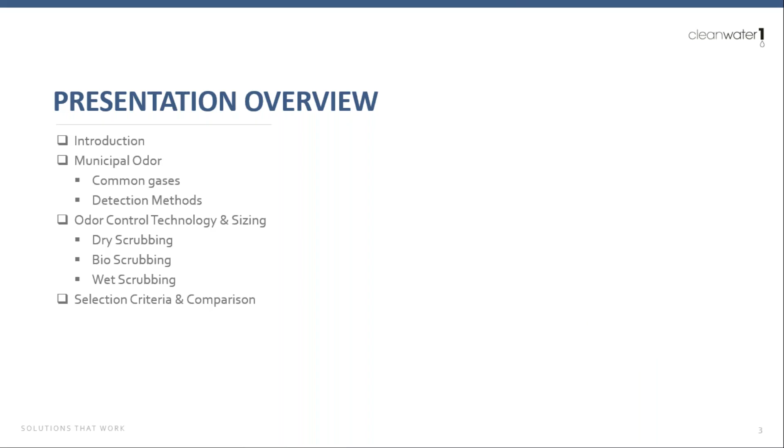Before we get into that, I want to do an audience poll. What best describes your role at your current company?

All right, so I'm looking at the poll now. We have about 67% engineers - awesome, welcome. We have some wastewater operators, everyone welcome, and some others undefined, but it's awesome. Great to see the attendance here for this webinar, greatly appreciated, and I think the information we have here should be quite beneficial and helpful.

So before we get started with the webinar, I just wanted to highlight some of the terms we'll be using during this webinar. Although a lot of these terms are used in my everyday vocabulary, it was brought to my attention that that may not be the case for others in this webinar, so I just want to make sure I'm being respectful as far as some of the terms.

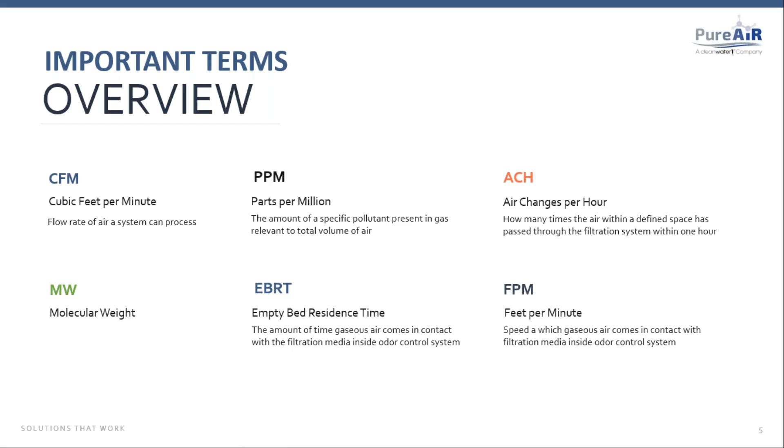For municipal odors, there are many processes that may cause odors in the municipal world. These odors can be generated at the collection systems or at the plant. It's important for us to understand, and we'll touch on it in the next slide, just highlight some of the most common gases, but also at each location it may have different challenges that may affect what would be the best solution.

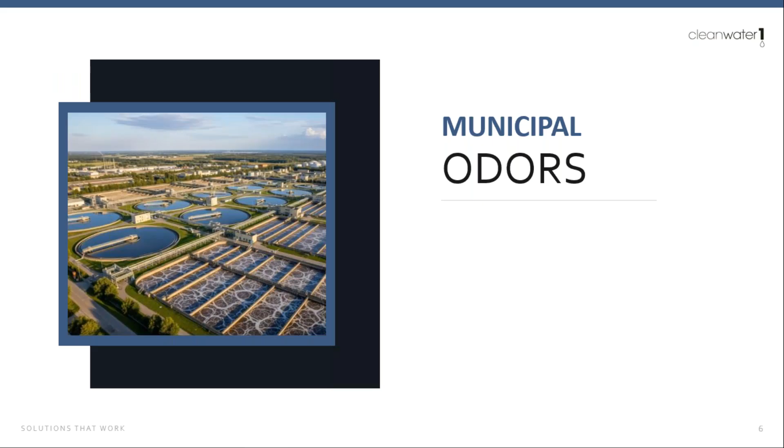That could come down to space or any space restrictions, site restrictions, or accessibility. For example, at collections, say lift stations, pump stations, etc., or also have force main, gravity sewers, and manholes. All those areas are going to have some type of odors depending on the process.

In general, the odors are going to be the same. You have the most common culprits, such as hydrogen sulfide, maybe some VOCs, mercaptans. But what can be challenging is, depending on those levels and concentrations, where do you put the system, or how can you fit the system to fit? Maybe it's a tight space or it's not easily accessible, and you have to get creative deciding what's the best system for that application.

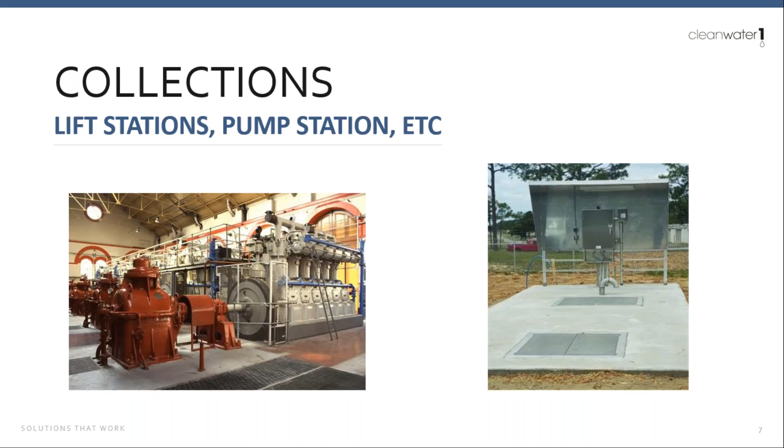Same with plant odors as well. Whether it's headworks, dewatering, belt press, etc., there are many processes in that facility. This has a great hand in creating different odors. And I definitely want to talk about, on some of the next slides, what are some of those common gases and how do we treat them.

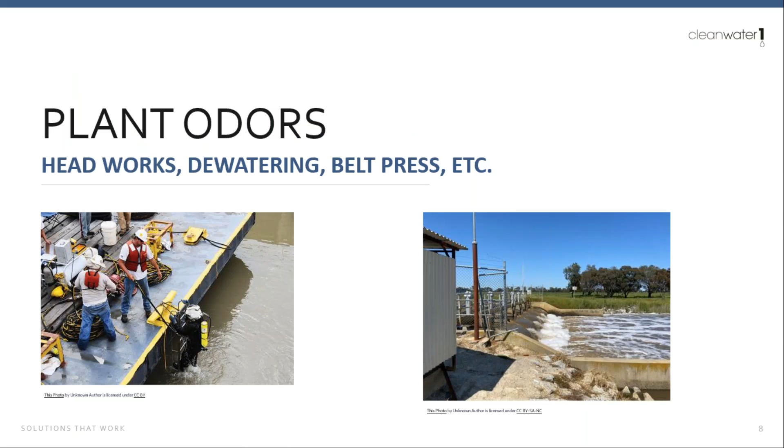Before we get to that, some concerns and considerations you want to keep in mind: each odor control application is going to be unique. You're not going to have just one, the same situation or same parameters as the next system. So you really got to take a look at the total odor removal, odor control needs. You're not just considering H2S.

Because H2S always brings friends along with it. There's going to be something else there besides H2S, whether it's some VOCs, mercaptans, reduced sulfur compounds. So with that, what do we need to do to make sure we're taking out all of the odors? Because if you just target one type of odor and the others are present, you're still going to get those complaints, or something's still going to be there present that's going to cause issues. So it's important to take a look at that.

We also have to allow for some flexibility as well. Because when I'm designing a system, you think about, all right, well, I know my airflow and maybe I know my gas level, or I might have to make some assumptions on the gas level, at least in the beginning stages. So we have that information right away. But what about footprint? Do I have any space? Are there any space restrictions? That could be very important to understand the best system.

I may think, well, we can use this system here, this would be perfect. But if it doesn't fit, you really can't use that. So you got to think of some creative ways to make sure you're selecting the right technology for that.

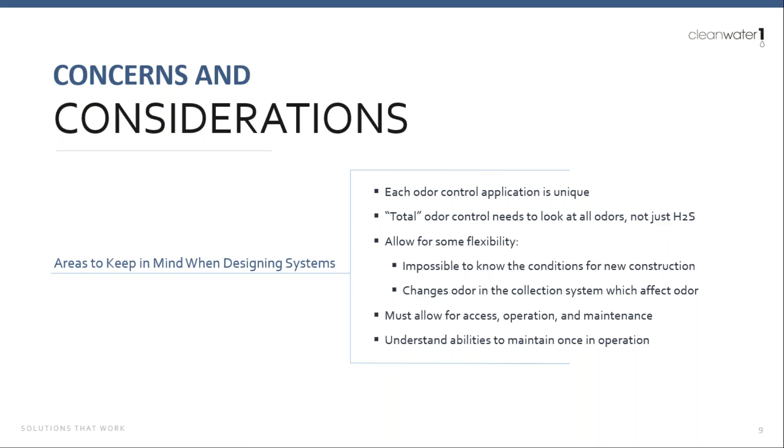All right, so some of the common gases in the municipal odor space. Now there's one way to figure out what odors are present, and you can just use your nose. This is probably the only method right now that I would use, only area where I would use my nose, if you're trying to identify a gas, at least in the beginning.

So it's not very scientific, but it can give you maybe a rough idea of what's present. For example, hydrogen sulfide, probably one of the more easy gases to detect. It has a rotten egg smell, and also a very low odor threshold. Now mercaptans and some of the reduced sulfur compounds, such as carbon disulfide, dimethyl sulfide, they have more of a rotten vegetable, decayed vegetable smell.

So you really just kind of get an idea once you walk onto a site. Okay, what am I noticing? So these are some of the odors, at least that gives you a start when designing the system, an idea. Now different odors are going to need different treatments as well, so once you know what's there, you can design the best solution, maybe a combination of different technologies, to give you that overall total odor removal.

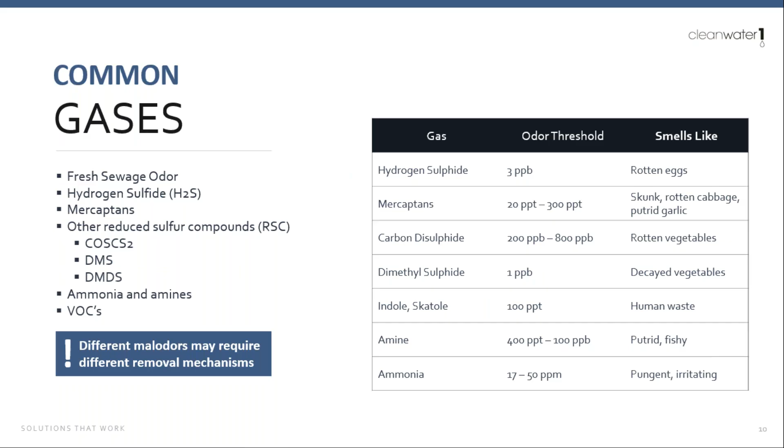Because again, you don't want to just focus on H2S, because his friends come along, and he brings more than one friend with him. So we want to make sure that we are taking a look at that, the total odor profile.

So now, like I said, using your nose, as well as making assumptions, can get you a good start on, okay, this is what gases I think are present. So we'll start off this solution. But at some point, when that project starts to progress, you really need to know what's in the airstream, so that way you are providing a complete solution.

So, for example, maybe two people can go on site. One person, using his nose, may have the scent of, say, rotten corn - I've heard that before, just describing some of the reduced sulfur compounds. Whereas someone else may smell just a beautiful aroma of putrid garlic. So which one is correct? Well, this person may smell it one way, this person smells it the other way.

So to eliminate some of that guesswork, there are a few detection methods that we use that determine, okay, what is exactly in this airstream? So it's important to use these methods to know what you have there.

So for example, the first one, if we suspect H2S and we want to eliminate that, there's a few different devices that can be used, whether it's OdaLogs and AcruLogs - we'll talk about that a little bit. So OdaLogs and AcruLogs are like H2S loggers. They can be placed in the odorous air source, usually left in place for maybe a week or two to three weeks or so. It could be longer. So what it's going to do is just log that H2S over time.

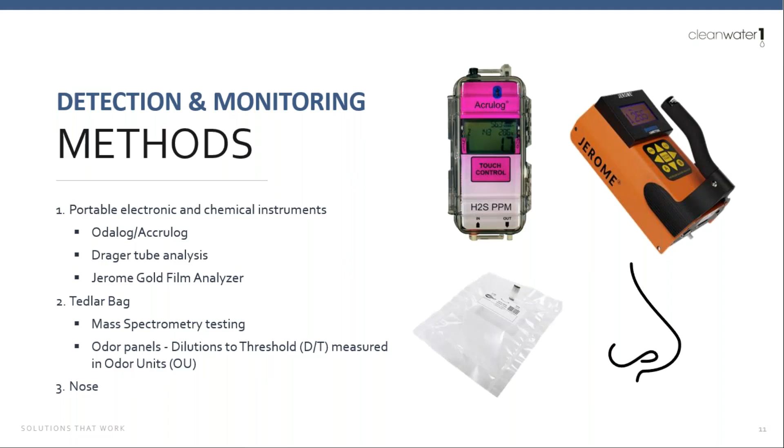So, odor control technology - today we're going to talk about 3 different types. We have dry scrubbing, wet chemical scrubbing, and also bio scrubbing for these systems. All these systems are designed to remove odors, and really the project conditions and parameters are going to determine the best and most cost-effective solution for doing that.

So in essence, what all these systems have in common, as we talked about with empty bed residence time, is that we need that odorous air to come in contact with the media - whether that's the dry media, the chemical scrubbing media, or the biological media. We need it to interact with that gas to remove it. So that is the end goal: to have complete odor-free air.

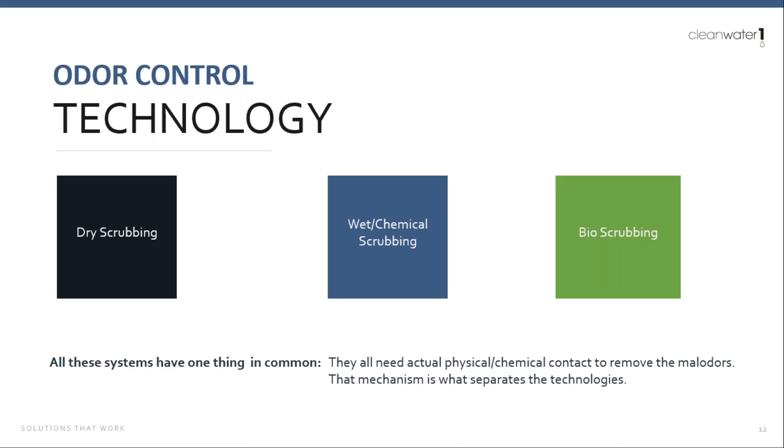So let's talk about some of the different technologies. We'll start off with dry scrubbing, the gas phase filtration. Really the best way of looking at dry scrubbing would be two different types: you have adsorption versus chemisorption.

So adsorption - just think of the adsorbent media for adsorption as a sponge. It's very similar: it's a very porous substrate, just used for air filtration. So sort of like a sponge, as a sponge is going to trap water, the actual media or substrate is going to capture those gases and hold them in place and not let them out.

Now, like a sponge, the process using just plain adsorption can be reversed. As you squeeze the sponge, you squeeze all the water out and reuse the sponge. In some cases, you can do that with some of the medias used for adsorption - whether that's reusing media by using water to wash away the gaseous molecules it trapped, or using heat to, in essence, regenerate the media itself. You may have heard of regenerated carbons, for example. So in those cases, it can be reused after reversing that process.

And in some cases, you may hear of off-gassing as well - whereas if the media captured a gaseous molecule, a larger molecule comes in and dislodges it, and that gas goes back into the airstream. So that's adsorption. Also, the term media life for adsorption can be difficult to measure, because there's really no quantifiable way to determine how much media is left in the pellet itself. So let's talk about chemisorption.

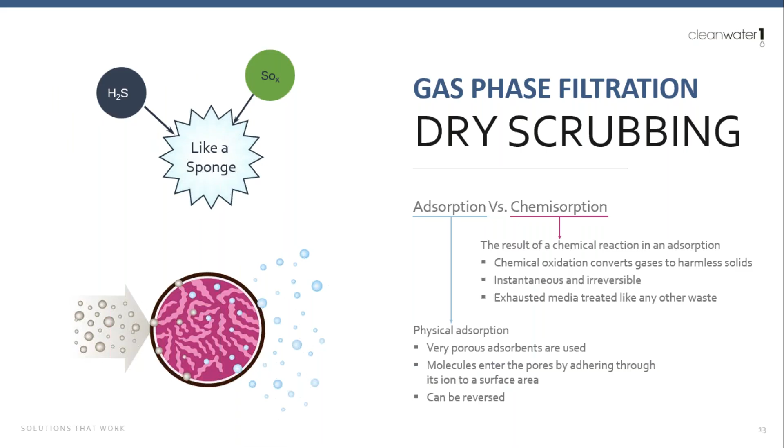Okay, this is a great slide. Just wanted to explain a little further how gas phase filtration works.

With filtration, let's talk about solids and liquids to give you an idea of the size of the different particles. Solids, in the form of dust or smoke, are about 0.03 to 100 microns in size. Typically, for example, a furnace filter in your home captures particles, and as it saturates, you take it out and put a new one in. Liquids, in the form of mist, are about 1 to 9 microns as well.

You have filters that capture that mist and drop it out. They can be permanent, or you can clean and reuse them for a period of time.

Now gases, as you can see, are very small in size, about 0.0003 to 0.007 microns. So a physical mechanical filter will not work, as those gases will pass right through it. That's why you need some type of substrate or media to capture those gases, and that's where the dry adsorbent media comes in.

Just for context, a strand of human hair is about 50 to 70 microns in diameter, which gives you an idea of the size. That wouldn't apply to me, since you guys saw in my photo my hair has long since departed, but for most it gives you an idea.

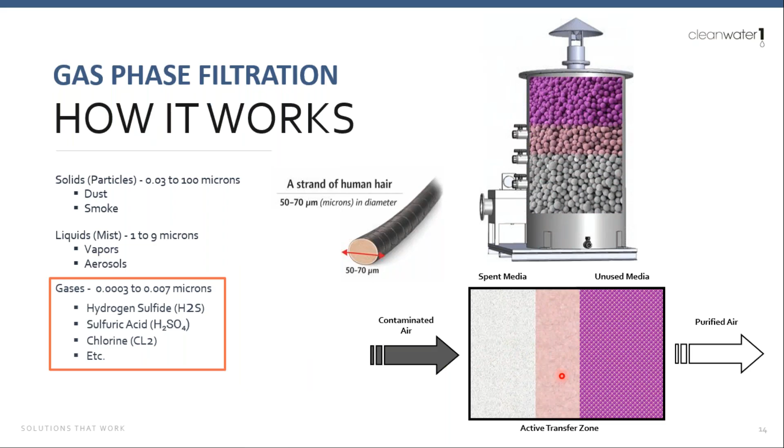Here are some of the activated carbons, different medias used for engineered adsorbents, activated carbons, and scavengers. As an example, activated carbon works more so as an adsorption media, capturing those odors and holding them in place. It's great for VOCs, not necessarily targeted gases, but it's been used for decades and is very effective for removing VOCs.

You have engineered adsorbents that can come in a host of different substrates and impregnates. This particular photo of an adsorbent impregnated with potassium permanganate gives that purple color, which is a great oxidizer for many different gases. The engineered adsorbents are designed to be targeted for particular gases, so they come in very handy.

It also allows for a system that's smaller in size, which can really help with any space restrictions as far as footprint as well.

And then we also have scavengers. These are great for a good low cost roughing type of filter or media that can be used in some applications. I liken scavengers to punching bags, they take the brunt of the hit while allowing some of the other medias to come in and polish it up.

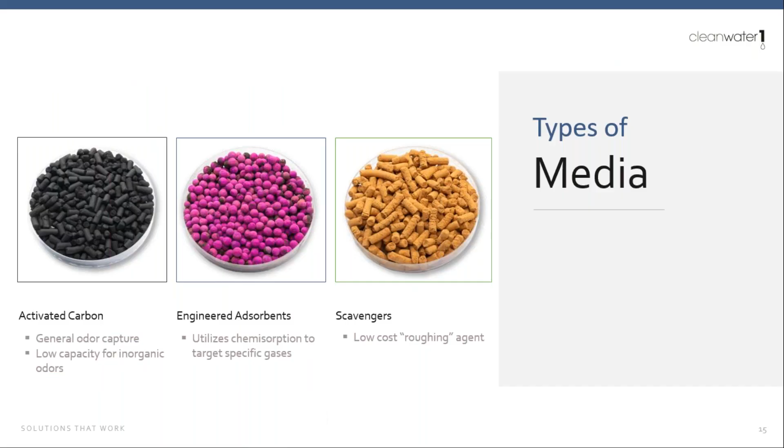Now, for dry filter media monitoring, as I mentioned previously, there's a working zone that moves throughout the media, and there are ways you can track that zone to know exactly when it's time to change it out. As I mentioned previously, when trying to determine odors, you can use your nose to get an idea of when it's time to change it out.

Now, this is one of those times where you do not want to use your nose to determine when your media is spent. This is a true story - I heard a vendor, who shall remain nameless to protect the innocent, say that the best way to know when it's time to change your media was to use your nose. Which means there's already breakthrough.

It took me a minute to think about that - wow, okay. So I had to break that down into terms someone would understand. I said that's the equivalent of saying the time to add fuel to your car is when you run out of gas.

That's probably not ideal. I think it's better to have a way of predicting when it's time to change out the media versus being reactive after you have breakthrough, or like having the fuel in your car stop. So it's very important.

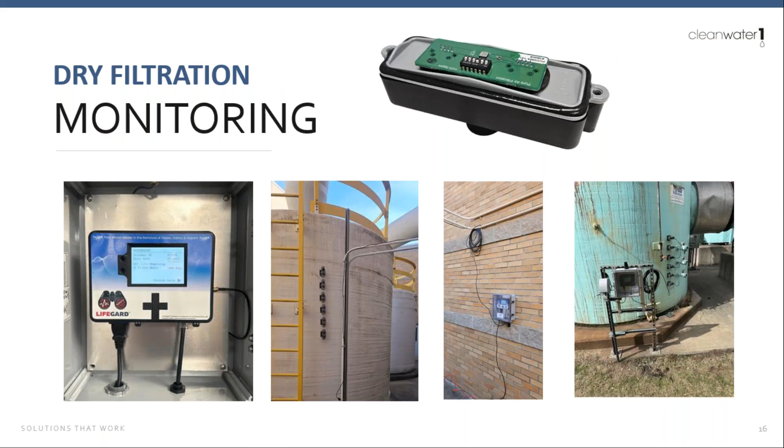Okay, so sizing the dry scrubber, for example - usually when I receive an email, someone needs an application and is looking for an odor control system. So the first information I would need is, what's the airflow? So we go back to those terms - CFM, cubic feet per minute. That's typically what we use here in the U.S., but there may be different terms used.

I didn't get into the different airflow terms used around the world, whether it's cubic meters per hour or liters per second, but usually that information is given to us - what's the CFM - and also in some cases they already have the odor levels, which is great. From there we can decide this is going to be the best system.

And we'll initially provide that. If we don't have other information, like space restrictions, that'd be the third question I would ask - what are our space restrictions? That way I can make sure I'm not providing a system that's too big or too large. You don't want to oversize something, and of course I definitely don't want to undersize it either. So we can go from there and come up with the best solution.

And also knowing those odor levels will determine the proper velocity that we want to use as well. Now, step back a little bit.

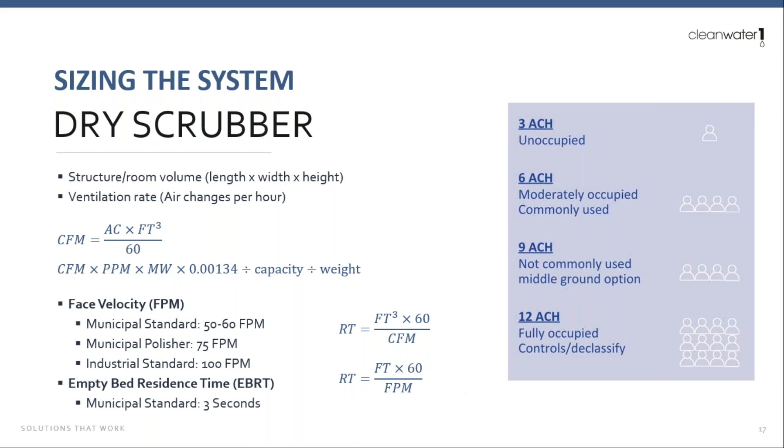All right, so some types of dry scrubbers. Depending on the size, the airflow required, gas level, if there's any site restrictions or footprint restrictions, that'll give us an idea of what will be the best system to use for this.

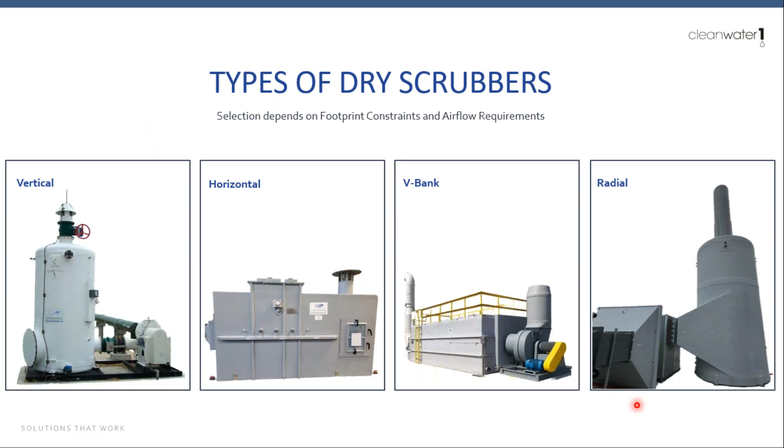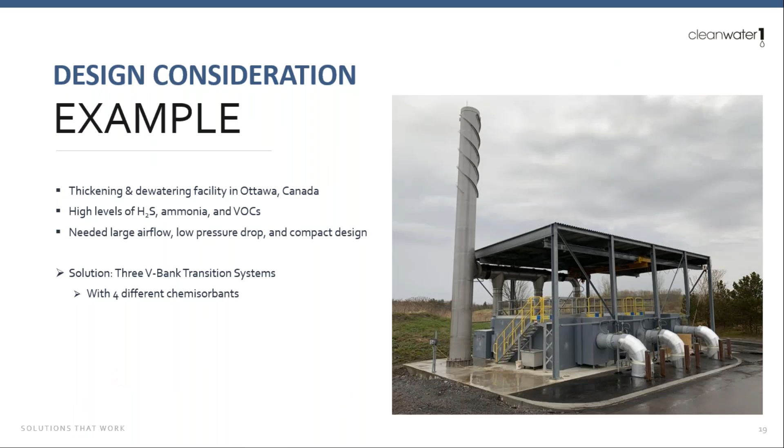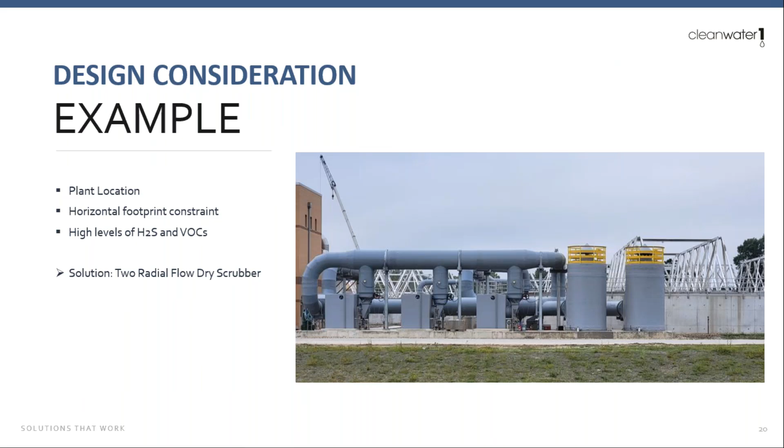All right, so now bioscrubbers. How do bioscrubbers work? Think of it as a vessel that's going to bring in the odorous air, primarily H2S. That H2S is going to travel through a biological media that's not impregnated, but that media houses bacteria that love to eat H2S. So the H2S air is going to pass through, and those - I'm going to call them bugs - are going to eat the H2S and it exhausts out. Typically they have a great removal rate of H2S between 95 to 99%.

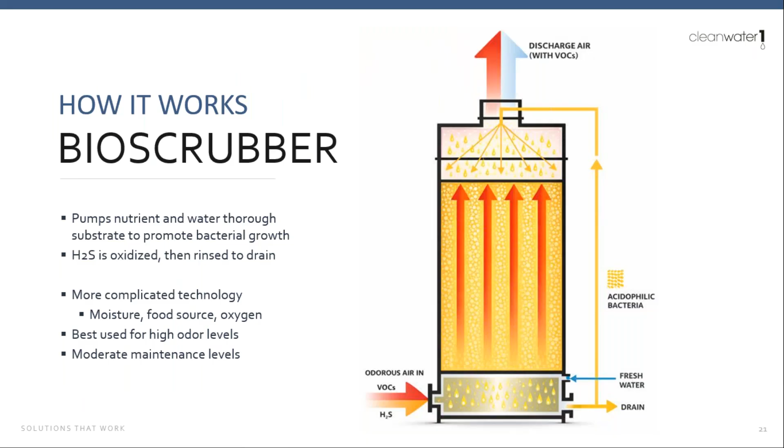Now with bioscrubbers, they love a humid atmosphere and need a constant source of food. So for any application under 5 ppm, the bioscrubber may not be the best solution. But once you get into higher levels, 100 to 200 ppm, that's when biological scrubbers make a lot of sense versus a dry system, because at those super high H2S levels you'd be changing out the dry media too frequently for it to make sense. That's where a biological scrubber comes in. The maintenance for biological scrubbers can also be a little lower, just from the nature of the process using fresh water and bacteria.

So a few different configurations for it. It really depends on footprint, any space restrictions—is it a remote location? Maybe if this is at a pump station it's not going to be manned, or a lift station, where these biological scrubbers can have lower maintenance, but you still have to keep an eye on it. So take a look at it, and also look at the H2S levels. In those cases, would it make sense to use a dry versus a biological? You have to look at it both ways and see the capital costs versus operating costs moving forward.

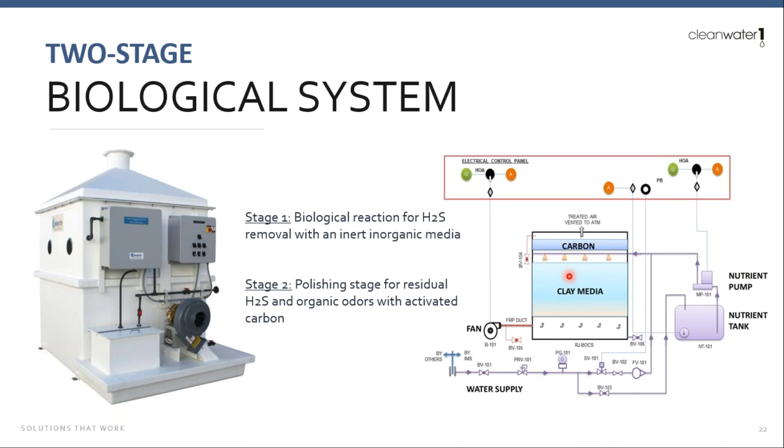So types of biomedia—depending on the vendor, you have multiple different types of biomedia. That just means something that's porous, that's going to hold on to the bacteria, give it a happy home. That could be foam blocks and sheets, lava rock, ceramic media, silica glass media, clay—just a whole host of different medias. These medias typically last about 10 years before they break down, so you get some life out of it. You just have to make sure that the conditions are optimal for the biological scrubber.

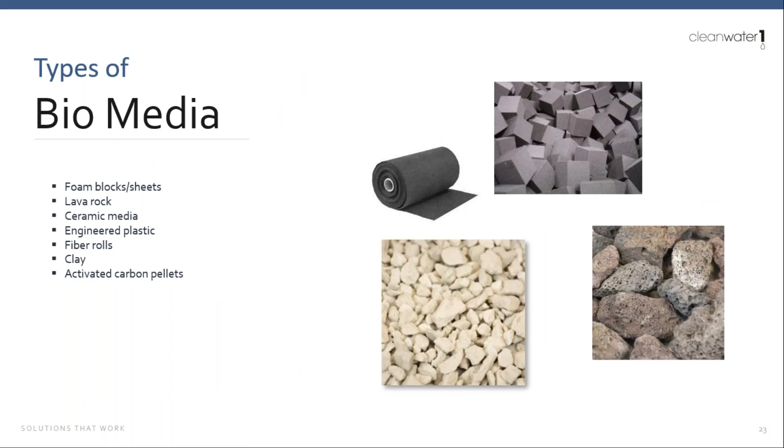Because similar to human beings—and I'll talk about that here on the next slide—the environmental conditions for a biological scrubber matter. If it's too hot, the bugs don't like it when it's too hot. It'll make them crazy, the way it makes some people crazy when it's too hot. It also doesn't like it too cold either. So it's important to keep an eye on when you're sizing the scrubber, understand the conditions. Now there are scrubbers in cold climates—it's not a problem, but as long as that's known, just make the provisions necessary for that. That will come down to whether you have to insulate and heat trace any water lines in the tank itself, just to make sure the bacteria still understand they have a happy environment to thrive and eat up the H2S.

Required removal efficiency is 99% at the outlet. In some cases it may work best to have a two-stage approach, where you have the actual biological media and then maybe a polishing media. Just understanding the flow per each vessel or tower—you're going from 1,000 to 6,000 CFM per tower, in that range.

And on the H2S levels, you need that steady source of food for the bacteria, so that is very important. You're looking at the average H2S level, not so much the peaks, but the average needs to be consistent. Otherwise the bacteria won't have anything to eat. And again, the size of the recirculation is based on the airflow and the loads as well.

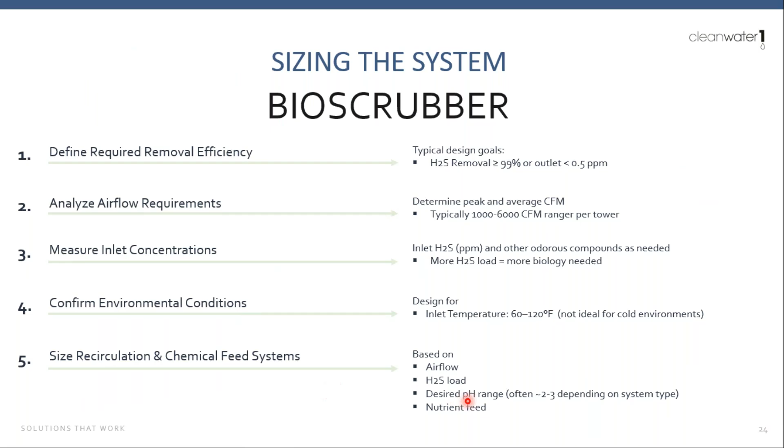Now it's recommended to have maybe a two-stage approach for wet scrubbing. The main reason is using sodium hypochlorite or bleach can be pretty expensive, and the H2S will use that up pretty fast. So if you have a two-stage solution, the first stage can be the sodium hydroxide or the caustic material, which will remove about 70-80% of the H2S.

So again, that's sort of like an H2S punching bag. It's going to take the heavy hit. And then you can use another stage that'll have a mixture of sodium hypochlorite and possibly caustic solution to polish off everything else, and possibly any other organics as well. So it gives you a good illustration of how that works.

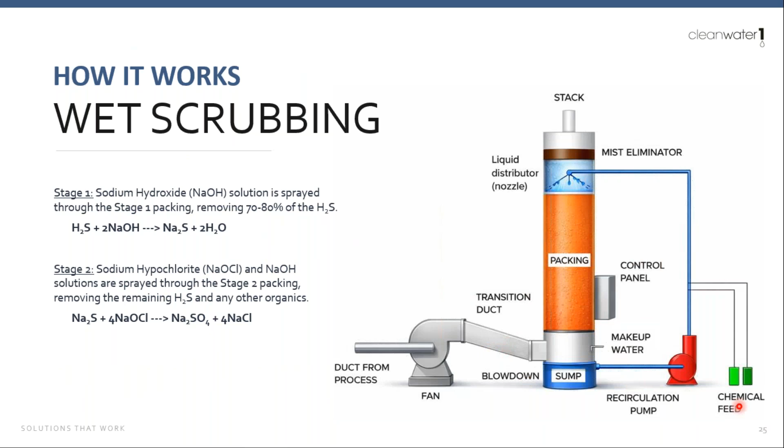And then the next slide shows the two-stage application. So you've got two illustrations, one on top, one on the bottom, one is the round tank configuration, and you get better chemical usage using this combination of two, like a two-stage system. That allows, as I mentioned, one stage to do the roughing of the H2S, while the second stage can be more polishing.

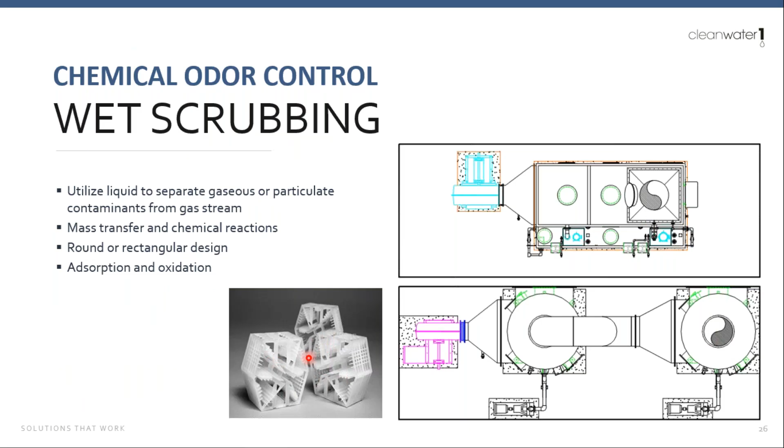Now, when it comes to design considerations, as you see, the rectangular system can be smaller versus round tanks. That's something to keep in mind when designing these systems. Is footprint important? That could determine what would be the best system to use. So again, with the two-stage arrangement, whereas the towers are rectangular, you get total removal there. Different tower packing materials are used to spray onto, and that's what captures the different gases.

So, odor control system and our selection criteria. What's most important? We need to know the airflow, contaminants, and the contaminant level. At least we can start with that. And from there, that'll determine what's going to be the best technology to use, whether it's dry, chemical, or biological. Then we have to consider any space restrictions and requirements as well.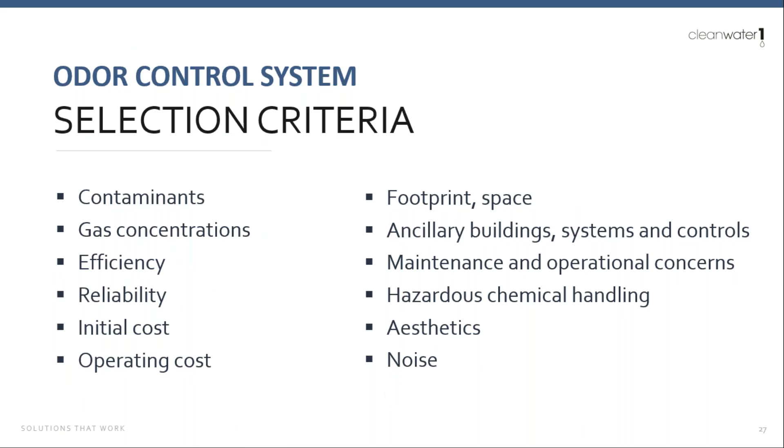And in some cases, even aesthetics can be important. There was a project in Arizona where the actual site had a mountain backdrop, so they wanted the unit painted a brown color to match the mountain, which was very unique, but that was a requirement that had to be done. So in some cases we keep those requirements in mind as well. Efficiency and reliability are very important too.

Okay, another audience poll. Which odor control technology are you most familiar with at your facility?

All right, the tallies are coming in. I'm seeing 41% dry scrubbing, 24% bio scrubbing, 12% wet scrubbing, 2% hybrid or multi-stage systems, and 22% none at the moment. All right, great breakdown, awesome.

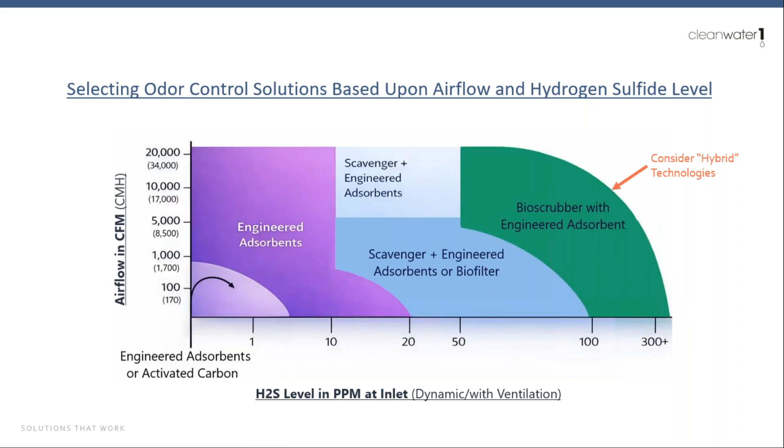So in some cases it may make sense to use maybe a dry system, even if it's low airflow, high levels may work out best for space requirements, for space restrictions. But once you have higher airflow, higher levels, well, maybe use a wet scrubber or a bio system, but then follow that up with a dry system. That way you're removing all the odors and getting rid of all the H2S and its friends.

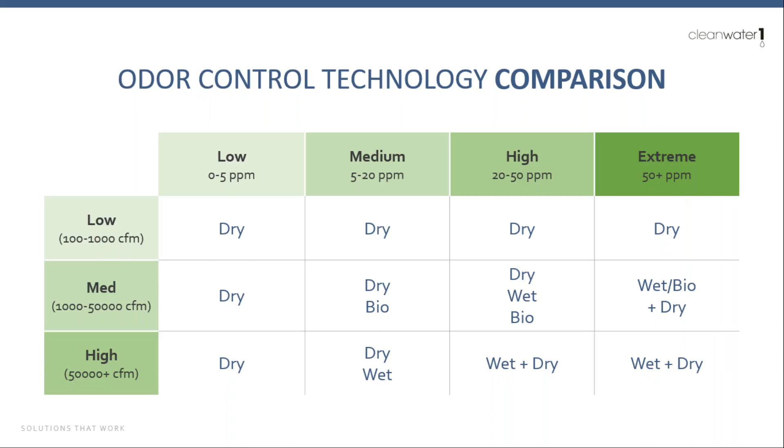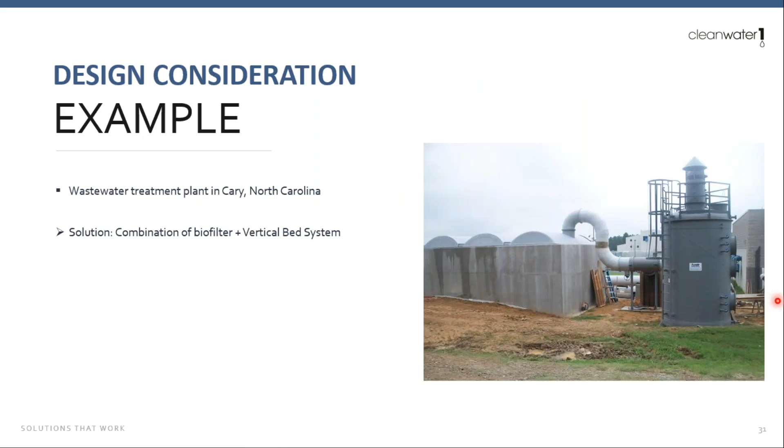Okay, so odor control technology comparison. Dry scrubbers: great, low maintenance, high efficiency. You can really customize it. May not be ideal for super high odor levels and high airflow. So you kind of take a look at it both ways and see what makes sense.

Biological scrubbers: non-hazardous chemicals, really effective at high levels of H2S. It may take some time for the bugs to get acclimated to the system, so it's important to look at that. In most cases, you have a polishing system that works out well, so as the biological scrubber is getting online, the polishing system can take over during that time.

Wet scrubbing, again, low footprint, great air movement, handles high levels of odors and high airflows. But one downside is you're using a lot of hazardous chemicals for wet scrubbing, and you're changing out that chemical every month or so. So it can be expensive as far as maintenance and dealing with that, but it does have its uses for certain applications.